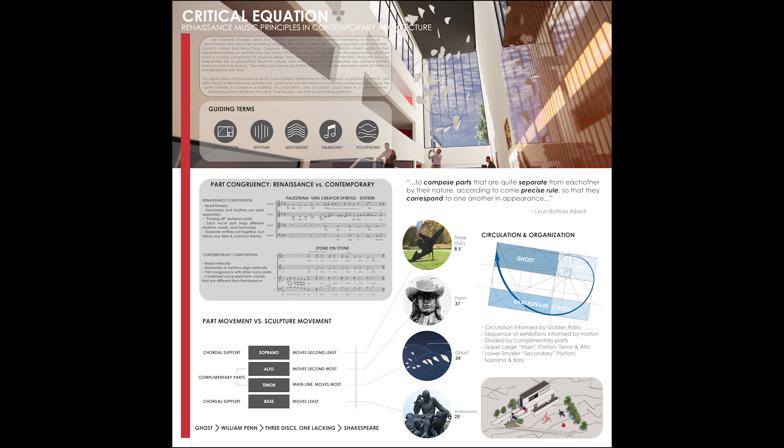From conversations with experts in Renaissance music, I was able to gain an understanding of how Renaissance music was composed and compare it to that of today's music. Renaissance music was composed and read linearly, with different vocal parts acting as separate entities, moving independently of one another and passing off lines between parts, while all still following a common theme. The two main parts in Renaissance music are tenor and alto. These lines move the most. They have chordal support from soprano and bass parts, moving less, respectively.

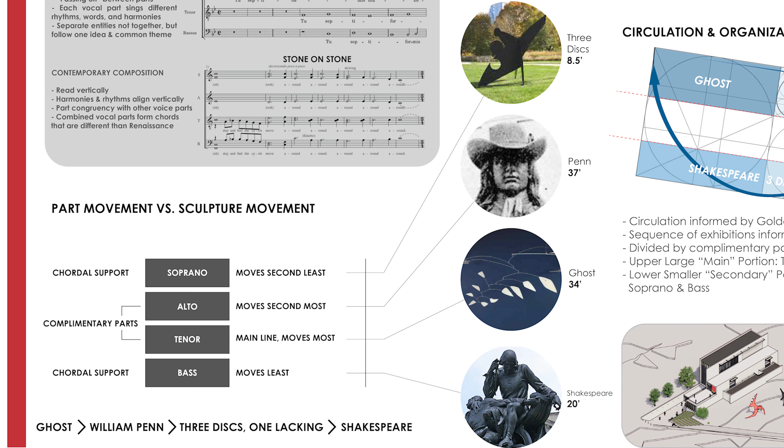For my analysis of the sculptures, I was able to organize them based on a perceived movement and scale. Ghost represents tenor, Penn, alto, Three Discs, One Lacking, soprano, and the Shakespeare Memorial, bass. The sculptures are divided into their spaces by complementary part relationships. Spaces are arranged and proportioned based off of the golden ratio, one of the most prominent proportions found in Renaissance music and design. The circulation through the main galleries is also based on the arcs found within the golden ratio.

The site has a great deal of pedestrian traffic and is located between 2 major roads with great deals of vehicular traffic. The triangular site slopes up by 10 feet from the front to the back, allowing the building to be sunken into the ground while maintaining a flat approach from the front of the site. From the entry plaza, visitors pass through a lobby where they feel compressed before entering the large, airy volume of the main hall. They are immediately greeted with Ghost hanging right above them, with the 37-foot-tall statue of William Penn beyond. As visitors approach Penn, they can look into the centrally located restoration shop or view other large Calder works on the walls.

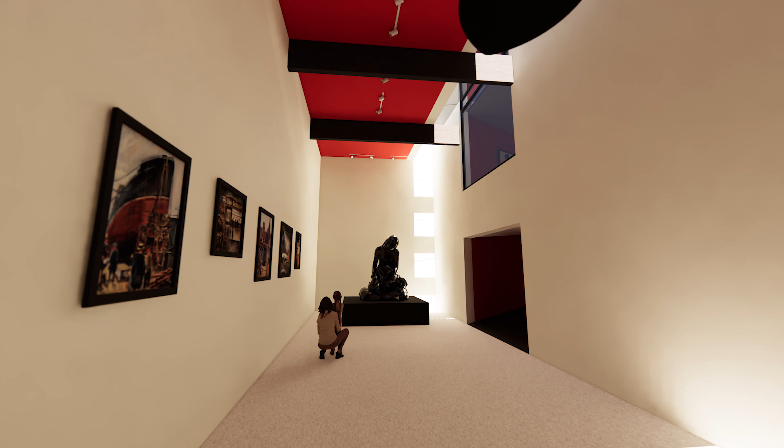Visitors then pass through the core of the building into the smaller galleries. The first is home to Three Discs, One Lacking, paired with art pieces that fit a similar aesthetic. The next gallery houses the Shakespeare Memorial and Calder works from a different era that fit the aesthetic of this space. These galleries feature a light well and skylight system to bathe the bare concrete walls in natural light. Traveling up into the 2nd and 3rd floors, visitors can see Calder paintings, prints, and smaller sculptures in galleries 2 and 3. From this level, visitors gain unique vantage points of Ghost and Penn never before possible. There is also a rooftop terrace that overlooks the entry plaza, sculpture garden, and Benjamin Franklin Parkway.

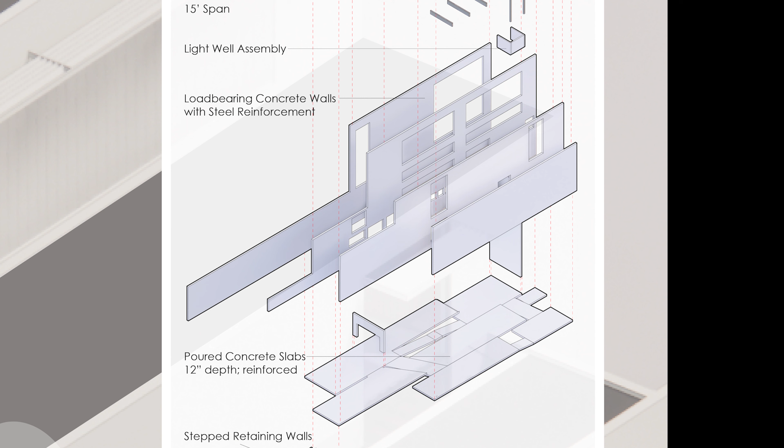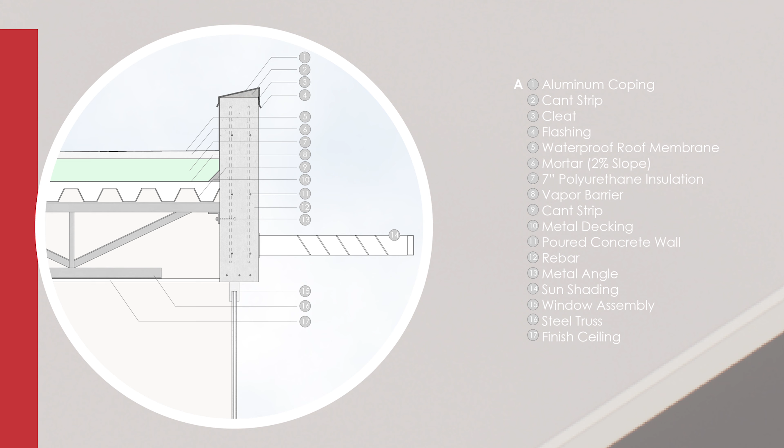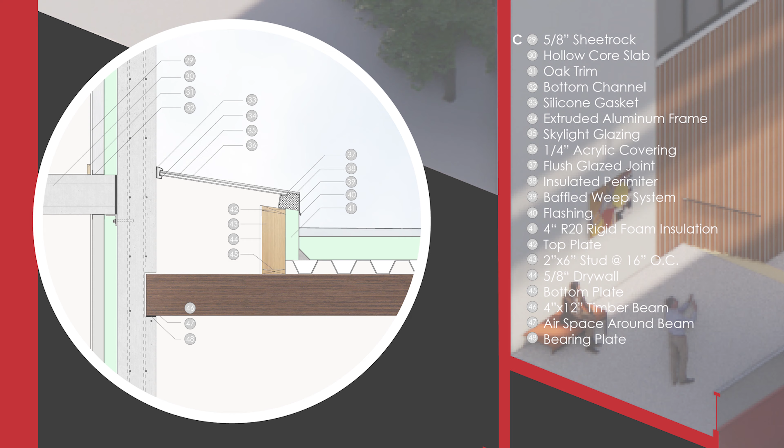The building and its heavy focus on proportions relating to music, nature, and housing the sculptures themselves is constructed with 4 main load-bearing concrete walls, forming 3 main volumes of the building. Between these walls, different floor and roof systems are implemented to suit each space's needs. The entire ground floor of the building is made from a poured concrete slab, ramping up or stepping down to different heights for each gallery. Over the main hall, steel trusses span between the walls to create the roof structure and support Ghost suspended from them. In the smaller galleries housing Three Discs and Shakespeare, heavy timber beams inset into the concrete walls support the roof and skylight structure. Finally, in the central core, concrete hollow core slabs span between the walls to create the restoration shop, galleries, and other administration and support spaces.

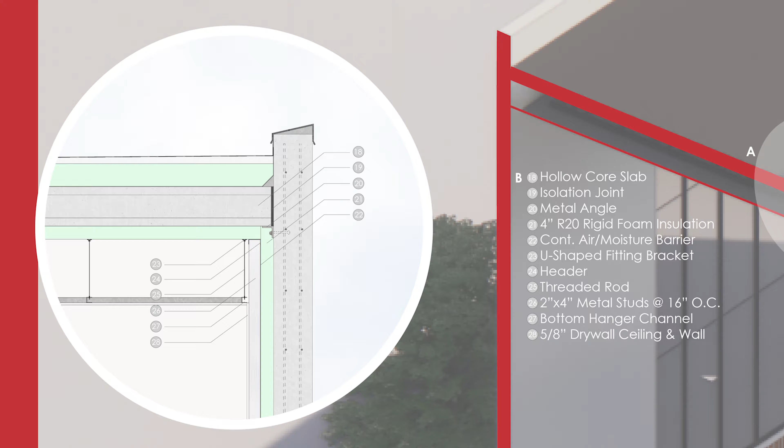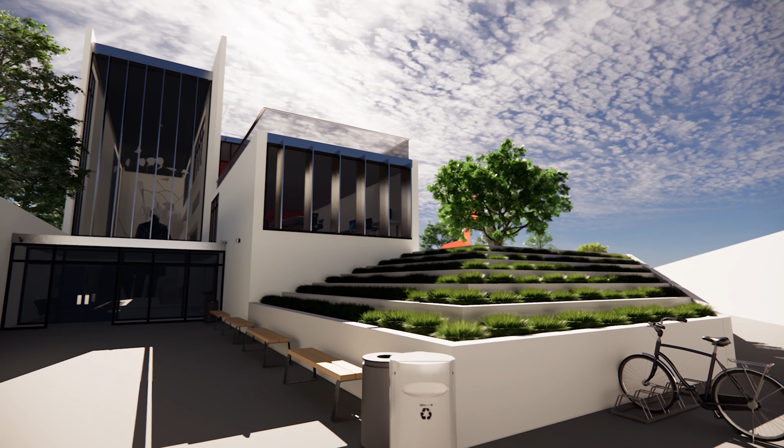Finishes are kept relatively plain to allow the focus to be on the art and play with light within the building. This proposal offers an immersive experience of the Calder family's art in the city where it is most appreciated. From massive stabiles to small wall hangings, all mediums of Calder art can be found here, maintained properly, and be enjoyed by visitors for years to come.